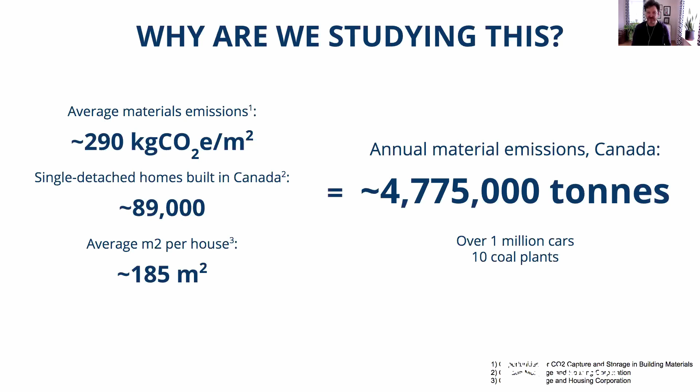Here we are in the residential building sector, able to make a bigger difference than that on an annual basis. So from the rough numbers we have, we know that this is important, and that's why we proposed this study.

What we're going to do is, first of all, get some accurate figures using actual house plans from Part 9 buildings in the GTHA, and apply the same methodology to assessing the carbon footprint of them. So we have this rough number of 290 kilograms of emissions per meter squared of building area. What we want to find out is, if we do this accurately on real buildings in this area, what do we see as that carbon footprint?

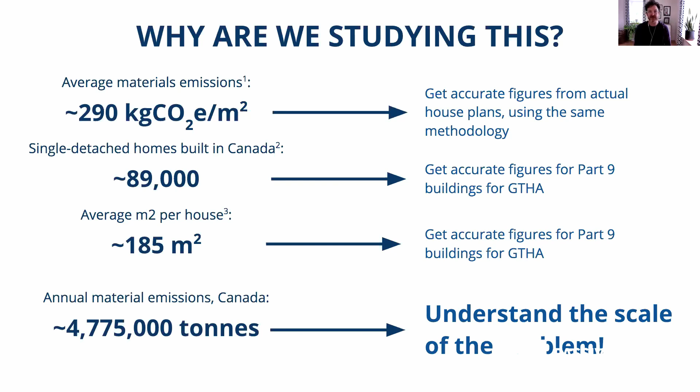We want to know for this region how many Part 9 buildings are built. We know there's about that many single detached homes built in Canada, but how many buildings fall into Part 9, which would include single family homes, duplexes, triplexes, row houses, townhouses, and even some small MURBs. How many of those are made here? And then figure out the sizes of them based on real plans, so that we can really nail down in the GTHA what is the scale of the emissions from these building materials.

Then what we want to do is be able to identify the high impact materials. Once we know what the emissions of all these buildings in the GTHA look like, which materials are contributing highly to that, what are the impacts of swapping out materials, and what sorts of design changes to those buildings might also result in some emission savings.

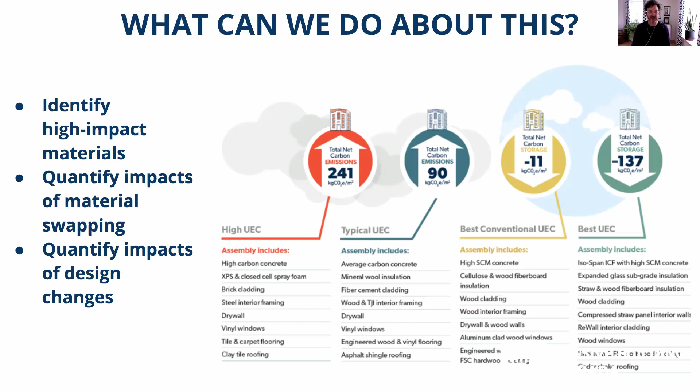The graphic on screen right now is from a study I did a couple years ago, where I applied to the exact same building model a whole series of different materials so that the building performed the same, met code in the same way, but as you can see, would have very different emissions profiles depending on the types of materials used. So what we want to do is know what GTHA Part 9 buildings look like now, and how we might be able to adjust the materials and designs of those buildings to make the numbers better.

Once we've identified the sort of average emissions in the GTHA, what we want to do is figure out what's an achievable level of emissions, and then work towards identifying policy options that would encourage those emission reductions.

So in Douro-Dummer, they have the very first incentive program to actually reward people for meeting a threshold like that. We don't know if that will be the threshold, or if this will be the result from the GTHA study, but this is sort of the idea of what we'd like to try to put forward.

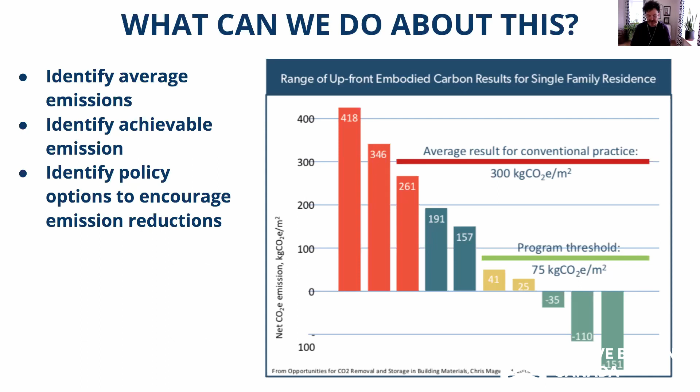Our plan for doing that looks like this. We need to get the building data and statistics from Part 9 buildings across the whole GTHA. We're going to collect building plans from builders and developers that match the profile of those buildings. So if 50% of the buildings were single family homes and 20% were row houses, however it pans out, we'll get that number of plans that reflect the type of building and the square footage that matches that average.

We will generate reports on all of those individual buildings using our BEAM calculator tool. From those results, we'll be able to analyze the results in the way I just described — looking at averages, means, high, low — and then starting to think about how policy, how building design, and how material selection could alter that scenario in our final report.

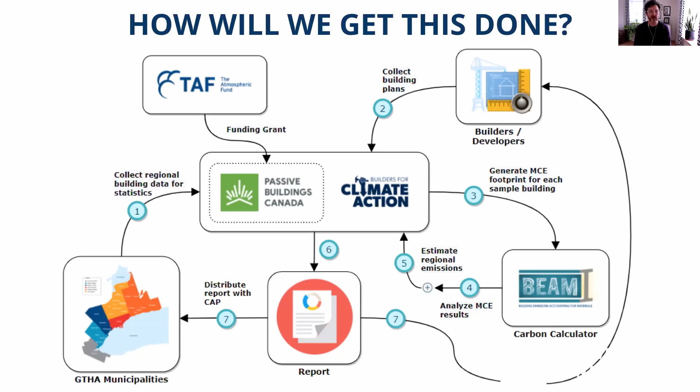The methodology we'll be using is our BEAM calculator, which we've been developing over the past year. We are developing it both for Builders for Climate Action, but also for NRCan. The BEAM calculator is a pretty straightforward way of looking at buildings' material emissions.

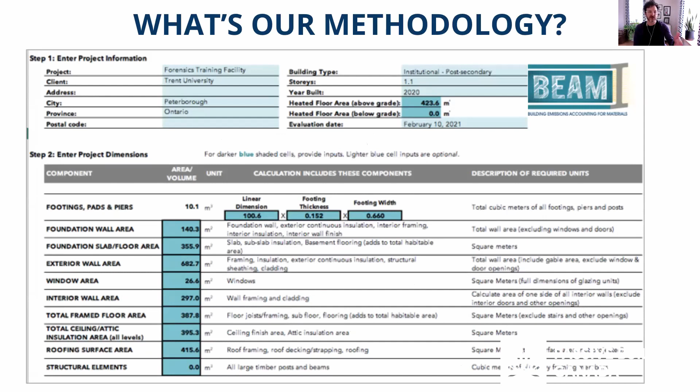You put in the key dimensions for the building you're studying, and essentially you can see by category the area of the building. So here you're looking at the exterior walls, the cavity insulation portion, and the carbon footprint of all the materials is there to match the R value and the size of the building. You can simply select the material that was used in that building, and once you go through all the levels of the building, you'll have a total carbon footprint for the entire project.

So this will be the first time that a benchmarking study has been done anywhere in the world where we're actually using the same methodology on all of the buildings. The few previous attempts at doing benchmark studies have looked at results from people using all kinds of different software, looking at different phases of the building. So it's been difficult to say well, this is what the material emissions look like, but by using this methodology for all the buildings in this study—

—we'll be able to make a really good description of what the current scenario looks like. And then we can also use BEAM to put in different materials to those same building models to look at what the results will be from material swapping.

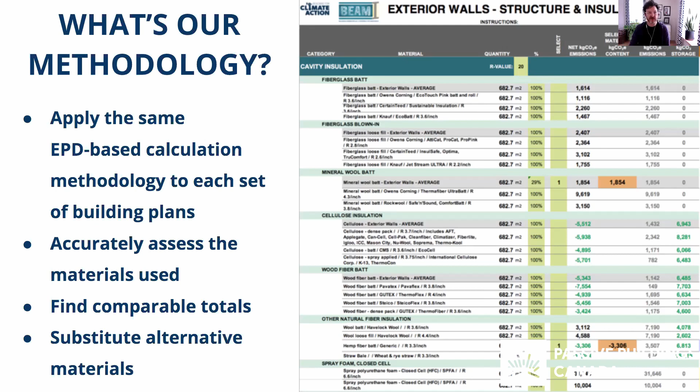Just as an example, as we were developing BEAM, we used it with Trent University to help them develop a new classroom facility on their campus. We initially ran BEAM with what the sort of average building that they would have built at Trent would have been, and that building would have had 211 tons of emissions. Using BEAM and helping them select better low carbon materials, we actually got that building so that instead it is storing 6 tons of carbon. So that's a pretty huge difference.

And these are the kinds of results that we'll be generating as part of this study. So we'll be able to say, well, this is what these buildings are, and this is where they could get to, and these are the things that would allow a building to get from a high case scenario to a best case scenario.

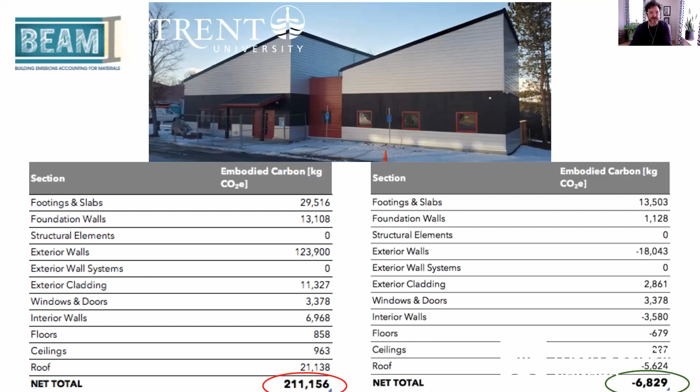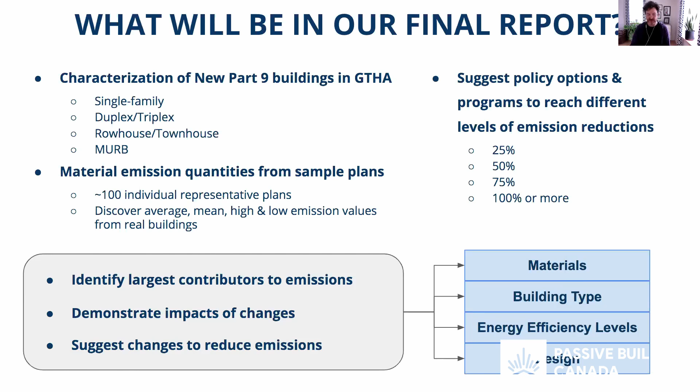That's the full length of the presentation, that's what we have in mind, and that's what we got funding from the Atmospheric Fund to undertake. We're just getting that whole project up and running now. I'm really happy to take any questions. Also, Eric Bowden is on the line, who is actually heading up the study, so if there are things I can't answer, Eric can jump in too.